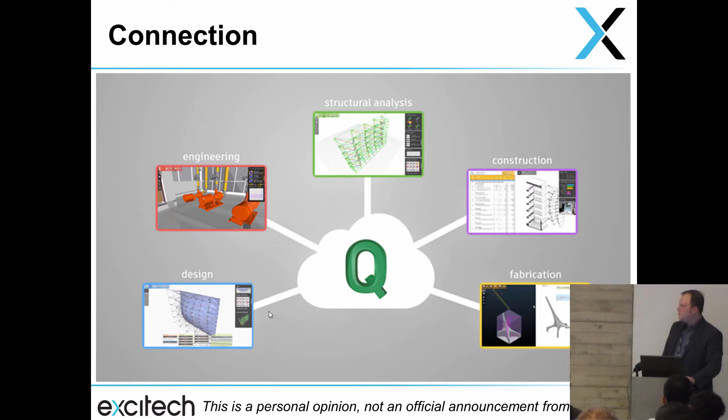Anybody do programming? Kevin. Len. Honestly, because my daughter's 5 and they've started teaching her how to do programming. It's starting to come through at all levels, and Autodesk are reacting to it, and they're right to react to it. You know, the programming skills bring about the ability to do whatever the hell you want.

You don't have to be restrained by what a software engineer has thought about you having to use this piece of software, like having to use their interfaces in the way that they've designed it, having to use their technology in the way that they've created it. It's all about hacking now.

I go to hackathons, Kevin goes to hackathons, a few of us all go to these things. I mean, it's all about ripping these things apart, putting them back together for another purpose, and programming is a really big part of that. And we're seeing Autodesk move into that world in a very, very big way at the moment.

Forge, anyone heard of Forge? Kevin. So Forge is a platform that is starting to underpin all of the Autodesk software. So you'll start to hear more about it, and if you get people in your business that can use it and manipulate it and work with it, it opens up all of the softwares that Autodesk have, and more. So not all of them are connected to Forge yet, but especially the cloud-based stuff, the BIM 360s, all of those sort of things are running on top of Forge.

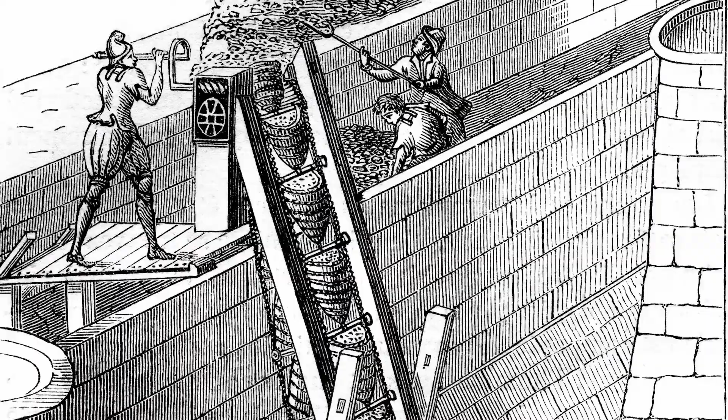Over the last 3.5 million years, we've created tools that have in turn helped us create our world. And while those tools have made more and more things possible, they've also defined our aesthetic and limited our imaginations. Until now, if you couldn't draw it, you couldn't fully imagine it. But what if instead of drawing what you already know, you could tell the computer what you want to accomplish?

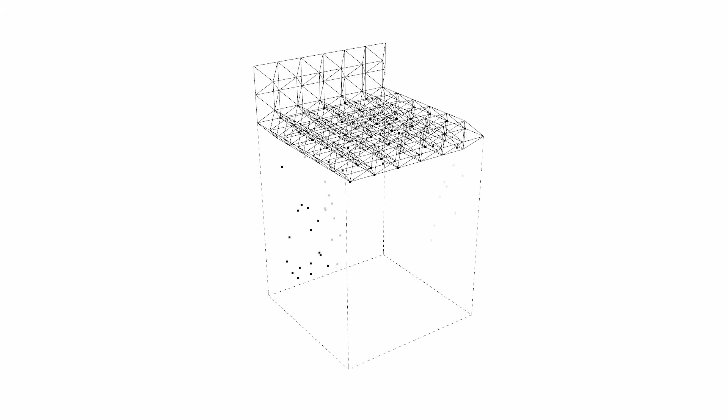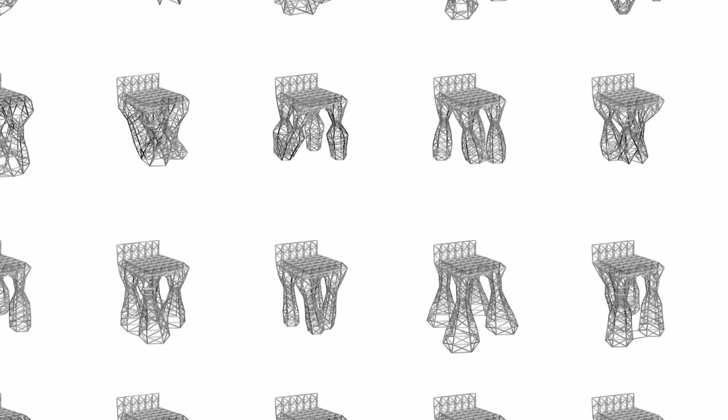For example, say I want to design a chair. Instead of drawing a chair and then playing with the form, I could instead tell the computer that I wanted a chair that can support this much weight, weigh this much, and cost this much, and produce something based on the material that I've chosen. The computer can then deliver to me thousands, if not millions of design options, all of which meet those criteria. And from those options, I can pick the one design that delivers on the most important criteria. And the one that I select might not even have been one that I could have imagined on my own. That's the promise of generative design.

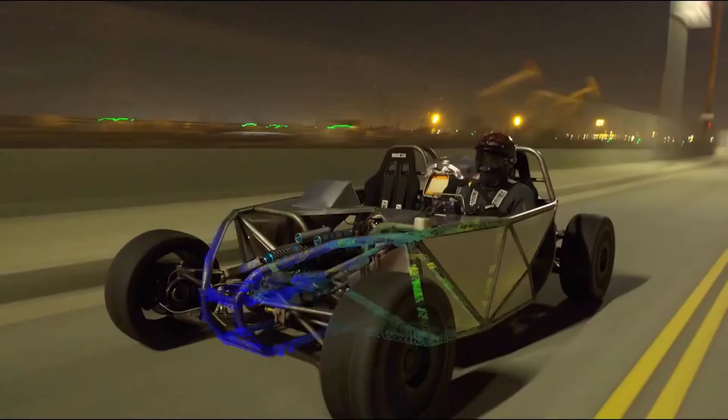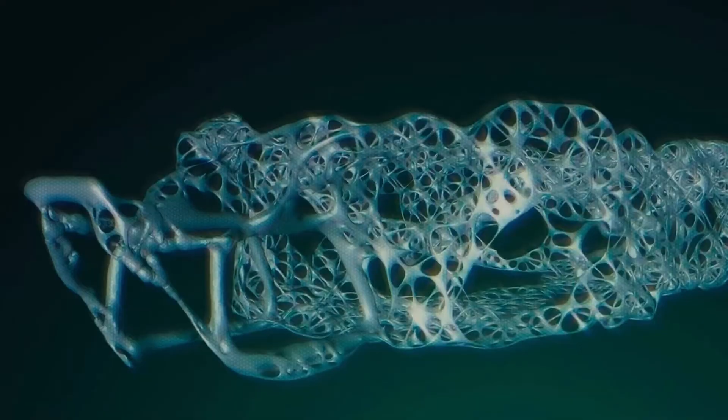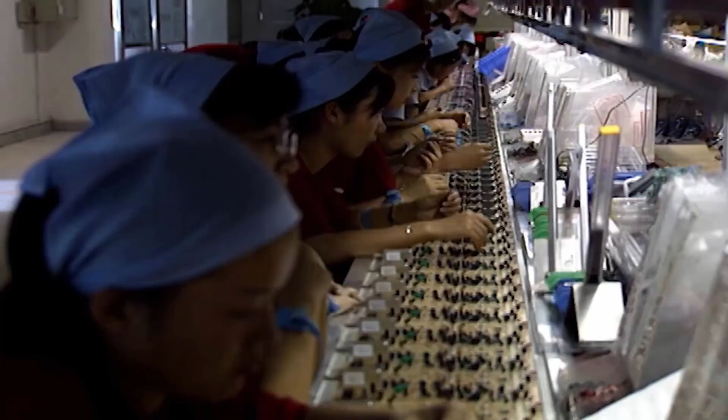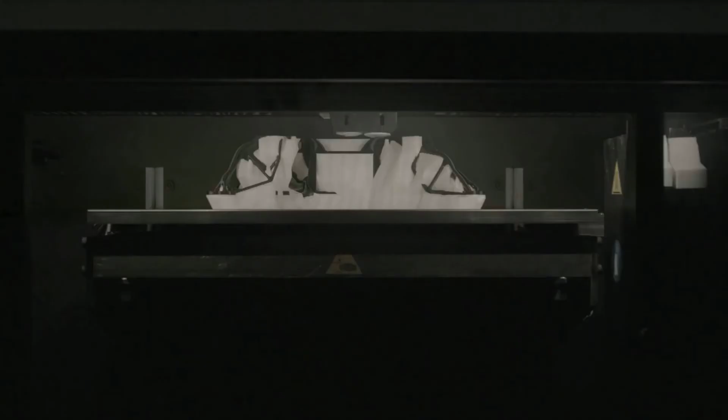But why is it important? It's an entirely new way of doing things, and the benefits are potentially staggering. Unprecedented reductions in costs, development time, material consumption. The sky's the limit. And when we combine generative design with the emergence of new forms of manufacturing like 3D printing, we suddenly have access. Traditional manufacturing methods require you to make massive numbers of something just in order to be profitable. Small designers without access to production resources were simply out of luck. But now we can do a batch run of just one. The stage is being set for the reemergence of local manufacturing.

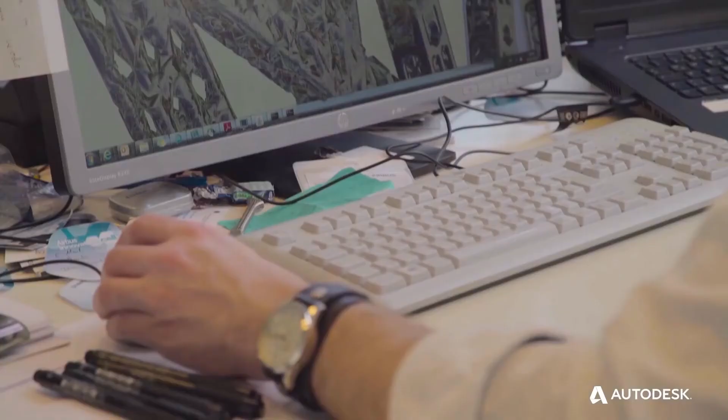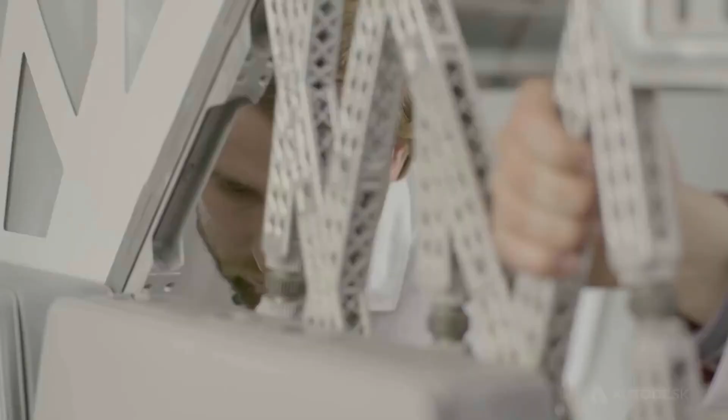Generative design extends beyond manufacturing. In fact, everything that's designed will be affected, including the built environment. How do you create an ideal floor plan? Can we balance structures for material type, strength, and energy consumption? Generative design promises a way to answer these questions and to create designs that avoid waste and control cost. So all that's great. What does this mean for the designer? Now they will co-create with the technology, choosing the constraints and setting the goals. The software simply determines the most optimized way of achieving those goals. It's going to lead to astounding results. And that's generative design.

People think it's a bit out there, but earlier this week I was in Germany working with a client of ours, and we've already started to look at a generative design process to actually optimize their CCTV system design. We put the criteria of where the cameras need to be in the room, and have the software throw back the options to us, rather than somebody manually trying to figure everything out and place it. It saves hours of time, and it usually results in a better result as well.

So these generative design ideas are real, and I think it's something you'll start hearing a lot more about from a lot of software companies, Autodesk included, over the next few years. But back to the slightly more now, and we'll talk about Revit.

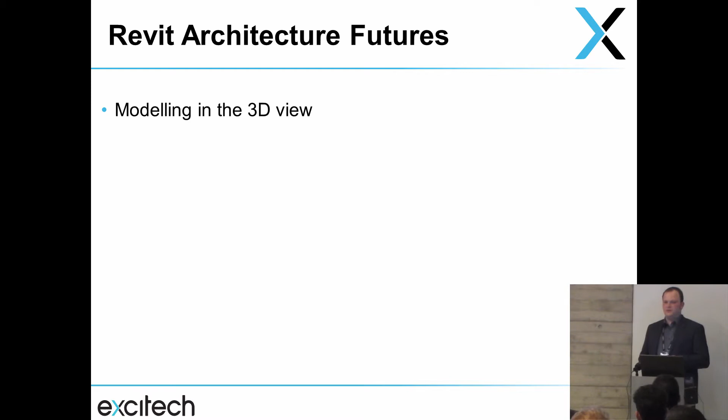The project browser is going to change. The project browser is going to become a visual browser. So it's going to change from its current hierarchical system, is what we understand. So we'll see that. There'll probably be an option to turn it back again, because there always is. You know, we're seeing new...

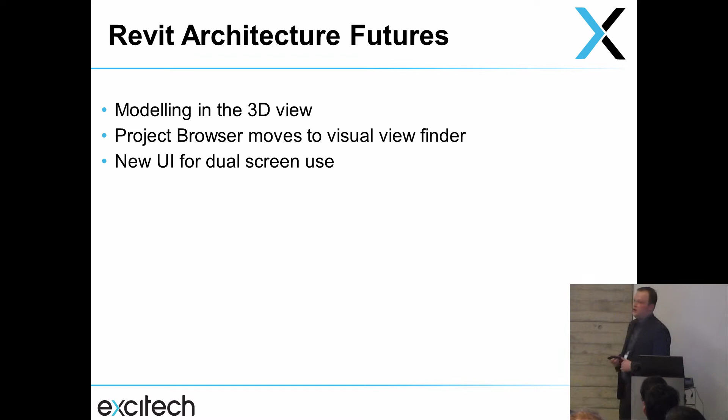Who uses dual screen? I imagine that's a good proportion of you. How irritating is it that you have to stretch the interface across both screens? That's now, I think, in the next service pack, going to be gone. It will have full dual screen capability.

Real-time clash detection. So in other words, the software will be able to very shortly inform you of clashes as they happen within the model. Okay, so some parts of that are there already, and they've been there for a while, like put a door in front of a wall, for example. It tells you there's an interference, but that's going to be extended into piping, ducting, all those sorts of things as well.

Okay. Stairs, yeah. Stairs? That's a great tool, isn't it? Stairs. Still won't be perfect, but you know they've improved it. You've always had multi-story stairs, that's nothing new, but this is an adaptive system that they're building into the software. So you build the rule basically of what the stairs should be, and then it will go and figure out the rest of the routine as it goes up the building. How well it works obviously remains to be seen.

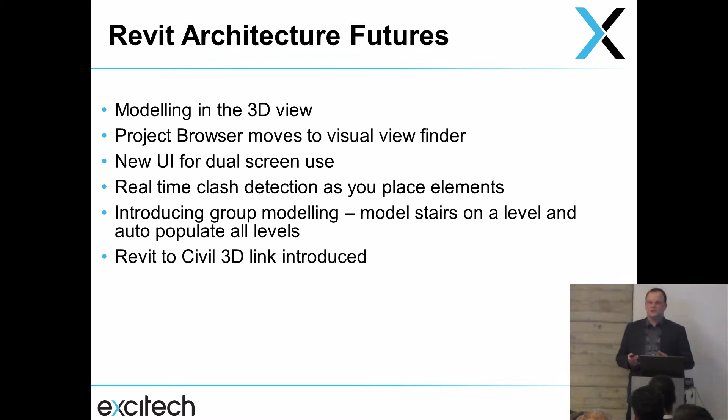There will be a much closer linking between Civil 3D and Revit, and this goes back to the key messaging from Autodesk. If you make changes in Civil 3D, we're expecting Revit to react and vice versa. So topographical changes, that sort of thing. There will also be the ability to link Navisworks very shortly into Revit as well. At the moment you can link in IFCs and things like that, but Navisworks can link in file formats galore, can't it? So we'll be able to bring in those additional file formats via Navisworks as well.

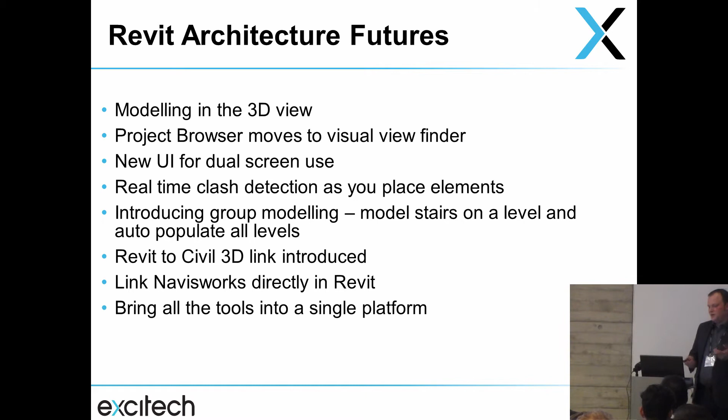Bring all the tools into a single platform, so you're probably not surprised to hear that the actual complete termination of the three versions is not very far away.

The immersive visualization, has anyone used Live yet? VR, augmented reality stuff. So it's pretty good. Some people argue there's better tools out there, to be honest, but for the cost and so forth, it does a pretty good job. But they're actually going to start putting some of that functionality into Revit. So rather than having to go out to an external environment, you can use it in Revit.

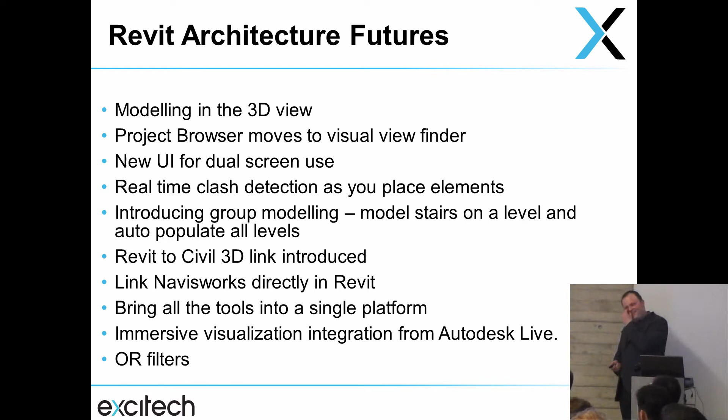And the really small one, the ability to use OR in filters. Of all the things, Kevin, that's the one you're excited about.

Structures. Who's structures in the room? There you go. There's a couple of you. Reinforced concrete. They've been working on reinforced concrete for years, but there's more happening. Adding rebar from freeform objects, which you would have hoped would have been there years ago, but it hasn't. The ability to freeze the rebar design, so the model can continue to develop, but the rebar design stays as it is. So if it's already on site and has been installed, then it won't change.

Concrete bridges, rule-based. So that's quite a good one, actually. Rule-based propagation. It's almost a generative design solution in some way. You put in the rules and the criteria that you want for the rebar, and instead of having to place all the bars yourself, it will figure out the optimal system for that rebar. Okay, so that might be a useful tool. Clash detection will come to rebar as well, which is part of the live system I just mentioned. There's going to be a big focus on precast, so precast units and so forth.

Fabrication. Connections, so one-click fabrication, so two beams connecting together, a column and a beam connecting together. There'll be tools to make the connections with wizards and so forth built into the software. There's always been stuff in the extensions, but this is going to be better integrated into the software and a lot more intuitive, is what we're told. As I say, I haven't seen any of this yet because it's not out yet, but this is what we're being told is happening. The steel connections will get an automatic designer as well, so the ability to make the steel connections automatically.

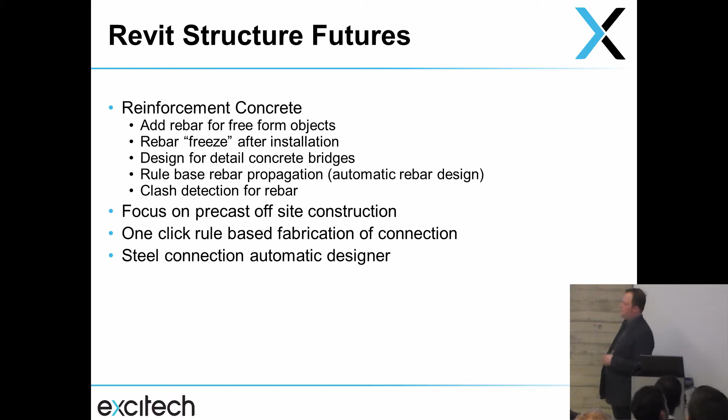There will be a structural detailer tool in there with over 100 structural details preloaded that you can use. And this again goes back, it is cross-platform, they're making big improvements to the detailing tools in Revit, is what we're told as well. So we don't know what the details of that are yet, so we'll have to see.

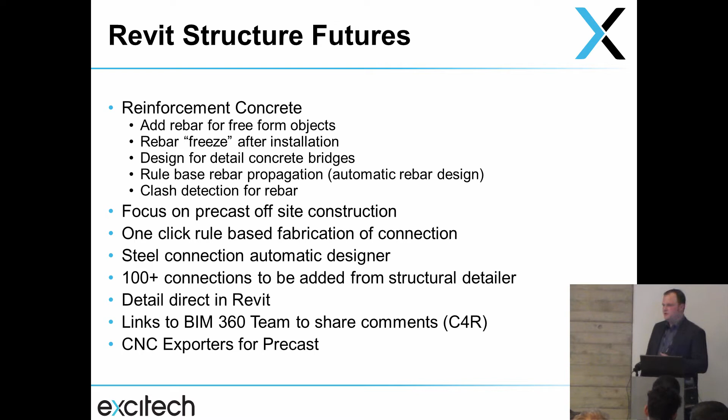And much bigger links to 360 Team, so if you use Team to make comments and so forth, you'll be able to see those comments back in Revit very shortly as well. CNC exporter for precast stuff, coming to structures soon as well.

MEP, so they are putting in P&ID schematical design as a link into the MEP side of things. So I've only got a couple of MEP people in the room, so who is MEP? So I'm talking to you at the moment. Oh no, there's a couple of you at the back.

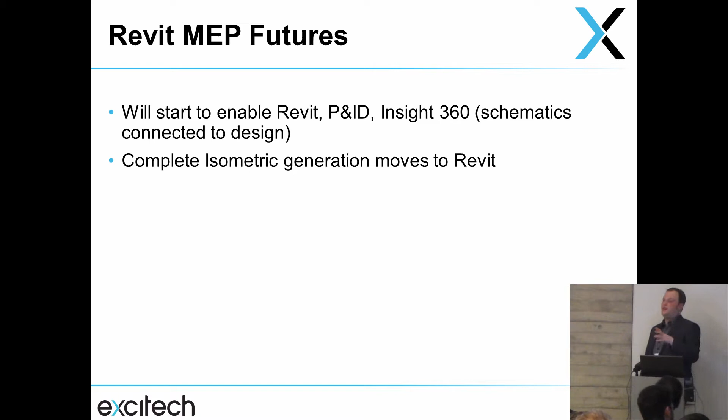So they got the P&ID stuff going in for schematical designs via the Insight 360 tools. They have improved, and again this is cross-platform, but it's particularly relevant to MEP, the isometric generation, so the way that the systems look. They've put the building types more. They've allowed you to change the building types, but it's still to the American ASHRAE.

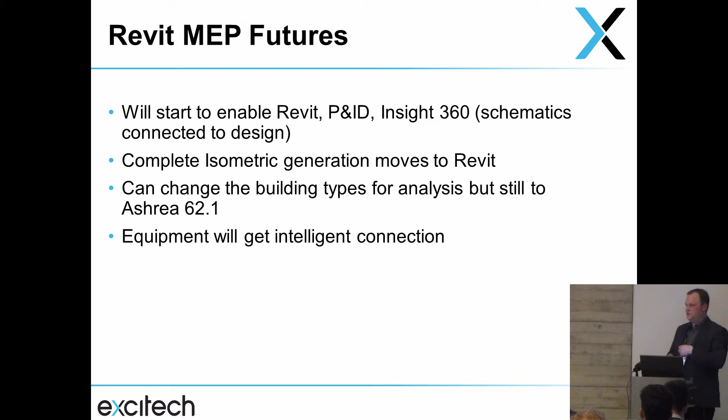Equipment. So that's the equipment stuff. As I understand it, it will no longer be so reliant on actual connections being in the families. You can actually start to manually put the connections onto the units on the fly, so to speak. So if you've got a BIM object that's come from somebody that hasn't added all the connectors on it, or it has incorrect connectors with the wrong sizes, you don't have to go into the family to add those. You can do it in the project environment.

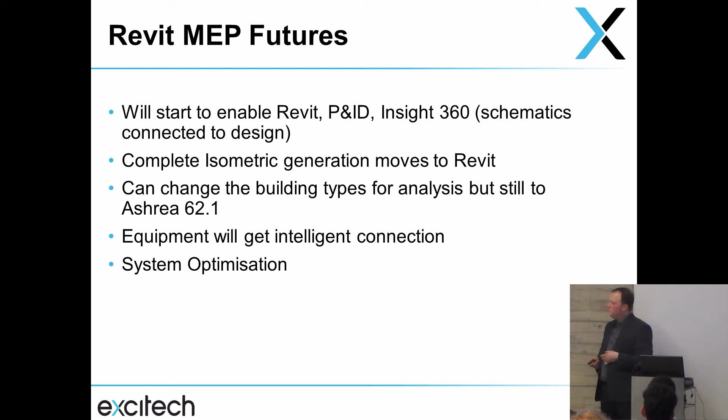There's going to be new system optimization tools, and these look pretty good. So route finding for all the systems, but also because it's going to get the live clash detection stuff as well, we're expecting that to work in conjunction with the live clash detection systems. So again, we'll hopefully learn more about that as well.

Did any of the MEP guys use Dalton when it was out on labs? Dalton was a fluid solver. Now I'm not an MEP engineer, so I'm going to bug out at this point. So hopefully if you're into fluid design, you'll find that of interest. But that Dalton software is becoming part of Revit very shortly, so watch out for that.

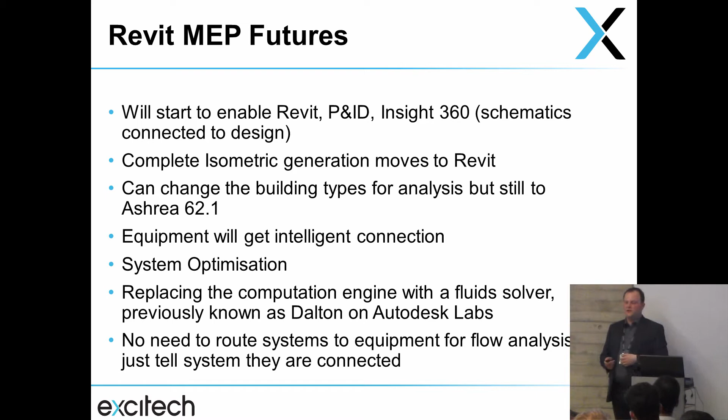So yeah, if you do flow analysis, want to work out flow rates, velocity rates, that kind of thing through a system, there's no longer any need to have the actual physical system model. You don't need to have the piping and the ducting actually in the system. You can just say these things are connected to one another, and it will work out the flow rates and velocities and so forth without that. Any questions?

Yeah, so with this particular manufacturer, we're currently building a digital catalogue which feeds in all of their, because it's camera design, focal lengths, lens types, all of these sorts of things that are used to calculate the optimization of those types of systems. We'll be putting that criteria into the system and then having it optimize the design, the camera positions, the angle of the positions, that sort of thing. And it should feed out hundreds of options, and then categorize the options by the preferences we've given. That's the idea of generative design anyway.

Quick things. First one, improving stairs is great, but any mention of railings? Yes. There was a mention of railings. Contextual railings becoming part of Revit in the not too distant future. The reason I didn't put it in here, to be honest, was because I'm still trying to understand what they mean by contextual railings. It's on the roadmap, but there's no other detail. So, have you got a comment?

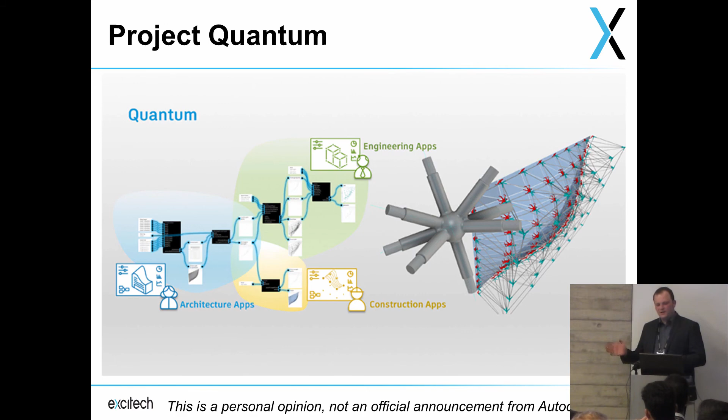The party line is like Uber, it's like Amazon, it's like IFTTT. The user will not see the complexity. It'll work. There'll be a library, you'll download it, and it'll be done. There'll be people like me who are geeks that will build the solution recipes behind you, and you'll take us all out for a beer the next day, sort of thing. But that's the idea of what this system is about, as far as we can tell. And it's a couple of years away. There's a lot of work to be done with this.

If you want to do further reading on it, the AEC magazine has got a... Does anyone get the AEC magazine? If you don't, start getting it, because it's a fantastic publication. And Martyn Day's written an article in there about Quantum, and it's about 5 pages long about all the detail of it and stuff like that, which is really good. And it's a really good read, and it's free of charge as well. You just go on the website and read it, or you can subscribe for free to the magazine as well.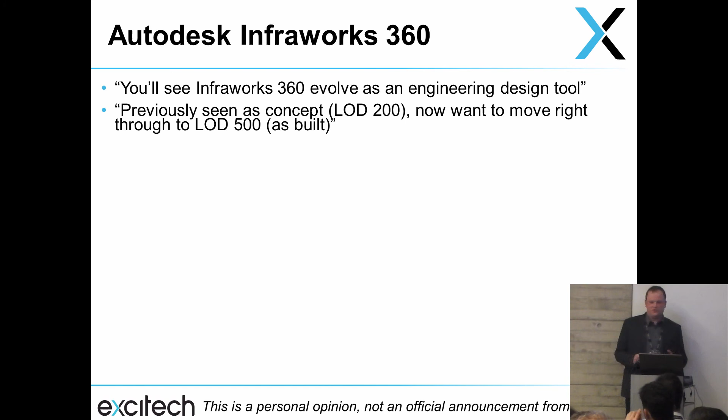A couple of last things. Infraworks. We're going to see Infraworks evolve. Does anybody use Infraworks? We've got one person. Infraworks, what is that? More into an engineering tool. So previously it's been very conceptual design for infrastructure. We're seeing it go into more detailed design. They're adding all sorts of stuff. If anybody wants to read this in detail, just ask me and I'll give you the slide.

Other news. Anticipate a lot of discussion over the next couple of years on generative design. There's a project out there called Factal, which is about generative space optimization, if you're interested in that sort of thing. There's a project called Dreamcatcher, which is about the exploration of shapes and materials within buildings, which is again worth a look at. AutoCAD now has PDF conversion to drawings.

That's going to upset some, as I've said there, because one of the things we've all... This is a very British thing, by the way. We think that we issue our drawings in PDF, and we say, well, that's because we don't want anybody else to rip off our drawings. I've never known anyone get sued for that, by the way. So you change someone's drawing, then it's them changing the drawing anyway. It's not your IP at that point anyway. But in America, they don't get this. You know, in America, they just issue DWGs and stuff like that. The concept of issuing PDFs is crazy.

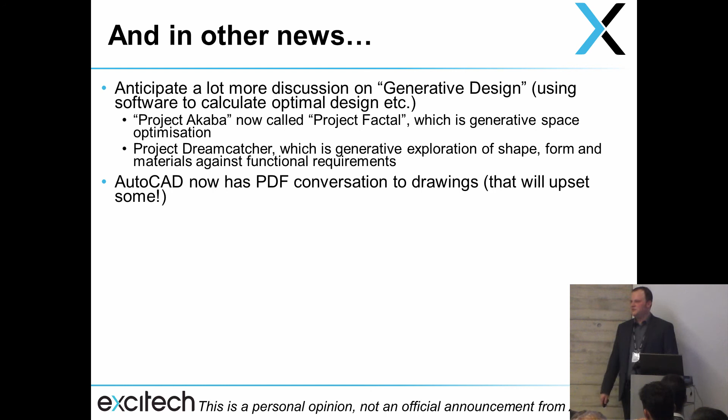So the idea of being able to convert PDFs back into normal AutoCAD drawings without any fuss is absolutely fine. For us, it's probably scary because it means that that nice protection system that we had is just gone. I know this is a Revit group, but that's in AutoCAD 2017, if people haven't seen it. Yeah, that one's already come out, hasn't it?

Yeah, it's not as... Leica, anyone do point scanning? Point cloud scanning? Yeah, 2, 3. So scanning's becoming more and more popular. Go and have a look at the BLK 360 by Leica. Fantastic device. It's that big. So you've seen laser scanners that are this high and cost God knows how much. This is £30,000, which sounds a lot of money until you see what laser scanners cost.

So this costs 30 grand, but it's that big, and you put it on any surface, it levels itself, and you can do a full scan of the room to a ridiculous decimation. So it's distance between the points, and it links directly within ReCap, so you can download the point cloud straight away.

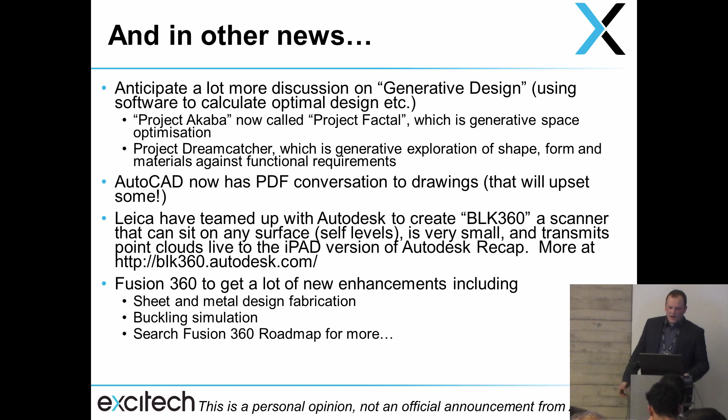Fusion 360 is getting a lot of enhancements as well. Fusion 360 is increasingly being used by object creators, like BIMobject and Lena. So for those of you who don't know, you can create objects now for all the platforms at once, for Revit, ArchiCAD, and all that. Without using IFC, you can use Lena, which is a script.

There is increasing rumour, and I'll go back to this comment at the bottom. There's increasing rumour that Revit is being rewritten. Its code underneath is being rewritten to allow for the Fusion engine to be brought in to replace the family editor in Revit. That's the rumour. And it's not without qualification. Carl Bass said it in 2015, but it hasn't materialised yet, so to speak.